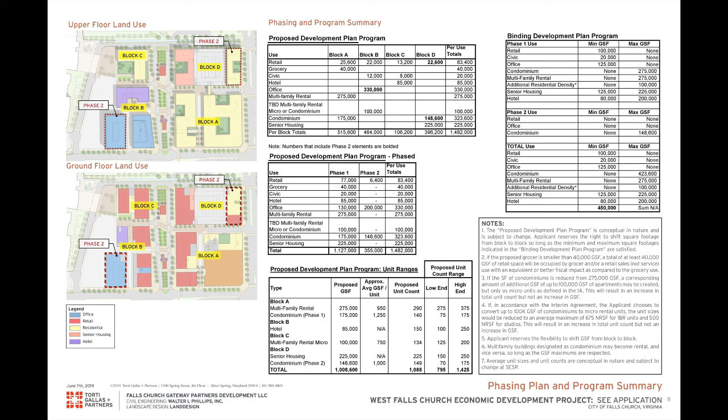And then similar here, we did reserve the right for the senior building to go back to this location, just in case. That's only if we aren't able to get—we don't think this is an issue anymore—but just in case the property shrinks to 9 acres, smaller.

This line would essentially come straight down. We couldn't fit the office building here anymore. So the office would go up here, Phase 2 res would be here, and then the senior housing would be able to fit here. So that's a kind of backup alternate plan just in case.

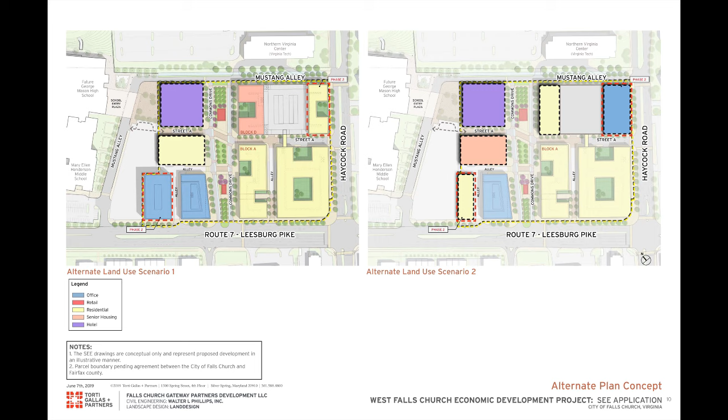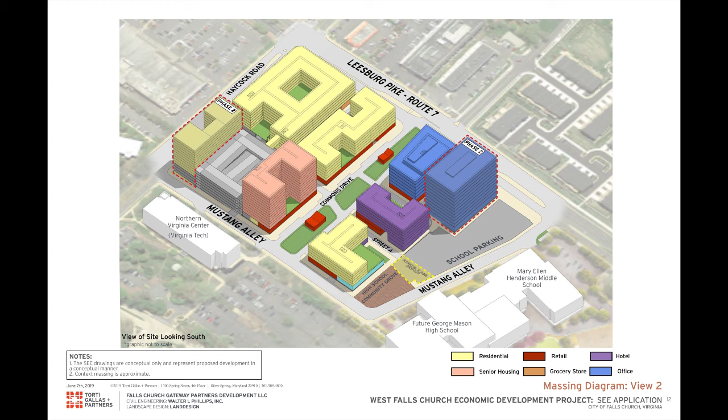And so the school is trying to figure out how to fit their parking count.

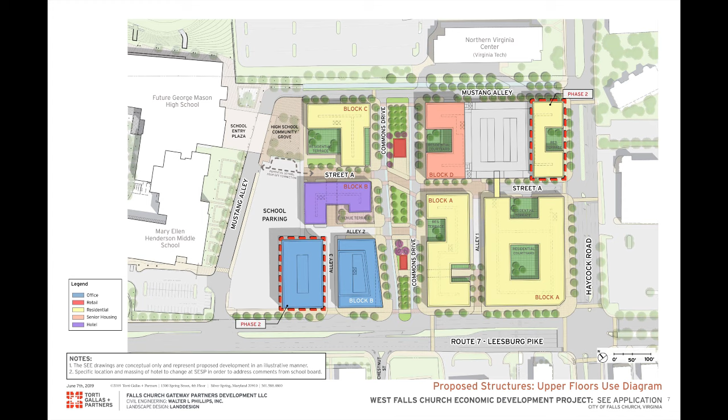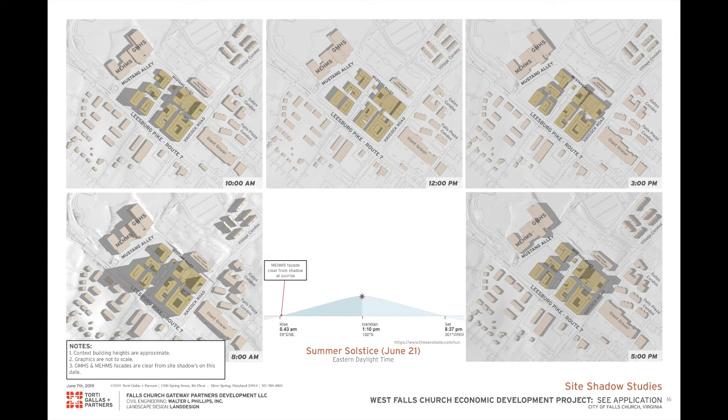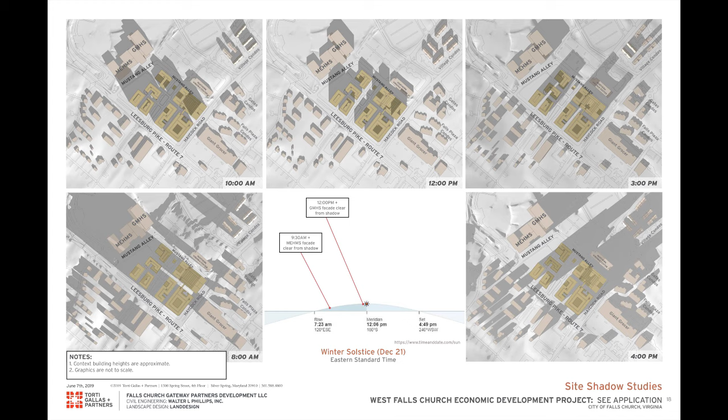Just to show you the few other changes—these are all in your packages. These are the new shadow studies, but as always, our site, because of the way we're looking at short days, is shaded as a buffer from the rest of the school. Other than December, in the winter morning at 8 a.m., everything is in shadow—the sun has just come up.

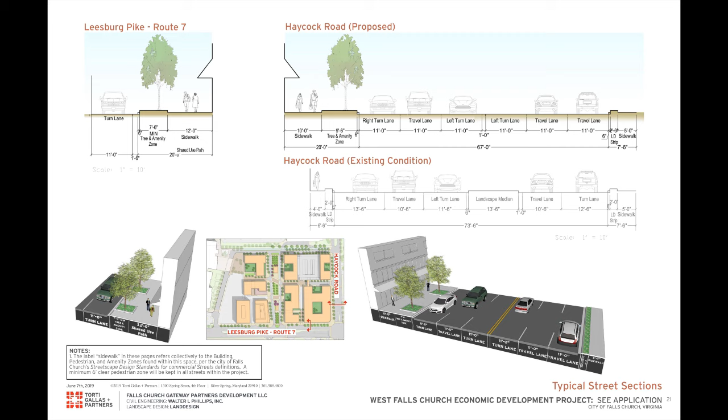We're also going to take advantage of the city standard, which allows for 3 trees in a continuous pit versus individual pits. Now it will give us almost a 90-foot long tree pit.

The other change is we're now showing 2 different bike solutions: the original bike solution, which is the cycle track on the road, and the solution with the bikes up on the other side of the curb. This is something we're going to study over the next 2 months, and when we come into SESP, we'll have to work with staff.

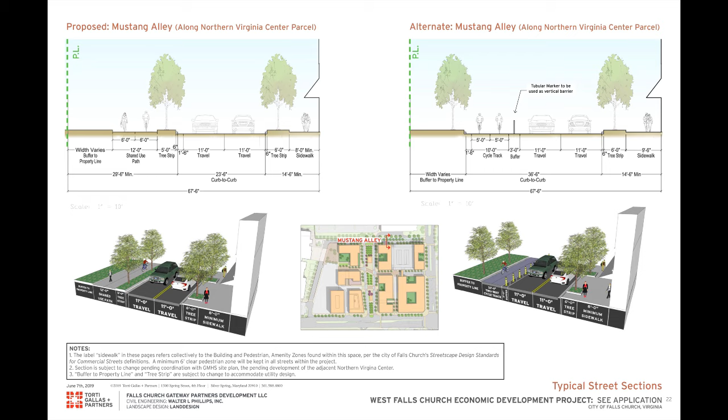Our latest thought is, depending on where the traffic study goes, that this actually might be the better solution. The reason is, in the future, if we need a left turn lane out of this road, especially now that we don't have one, Mustang Alley might need to be a right 2-lane plus a turn lane. So if we need that extra width, we can come out of the bike lane and the bike lanes can go up.

And still have a... that might be a couple of months before we show that interim condition.

Where would there be a left turn that we might need? So is it a left? Show it in the plan, put you in the plan.

So we've shown this as a 1-lane in, 1-lane out road. If this becomes a real traffic light, which is something a number of our boards and commissions meetings have asked of us, it would be logical that cars would want to make that left turn. So then, in order to have traffic flow, we would have a typical right lane and a left lane out.

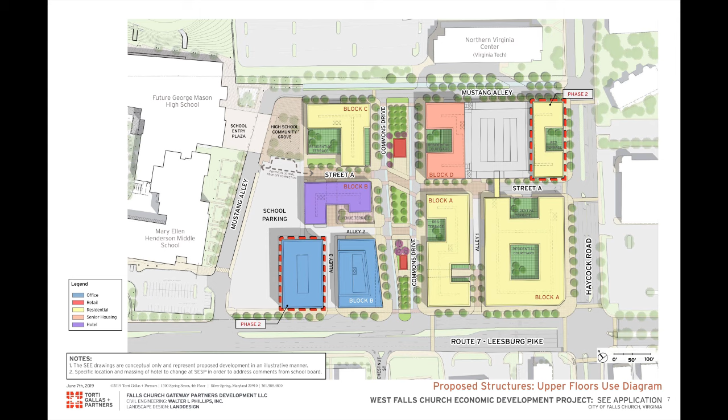One way to achieve that: in the interim condition you have 2 lanes, just 1 lane in, 1 lane out. Virginia Tech develops, the city and the schools own 20 feet of land on the north side of that street, and Virginia Tech will be set back from that 20 feet, so you'll have this 30-foot area. One option is we turn the bike lane into a turn lane and stripe it, with the bikes up on the new curb and sidewalk, so there's plenty of space for it.

There's not enough width, so the street's just not wide enough. You could do it by reducing the sidewalk on the south side, but it's already a small sidewalk.

So right now, the city and the schools own that 20-foot space between our side. It's something that can't be built necessarily right now, but we know it's likely to develop in the future after us. We just think about what the plan is originally about.

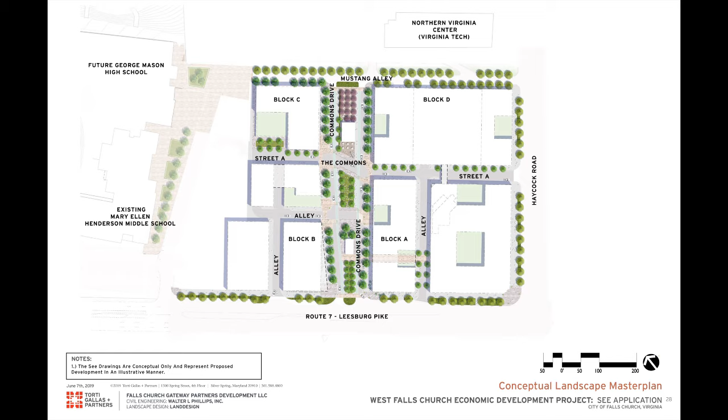So there's a green space up on the north side, an outdoor fun active space outside the kiosk, a nice big green space in the center, and similar spaces on the south side. We like the idea of the music venue here and the outside music space here, with the ability to close down this middle of the project. People would be able to sit out here and listen to music - really special. So that's not a change as much as just a shift.

And that is the last one. Those are the changes to the original plan. And then obviously we have the whole SEE.

All right, thank you very much. Are there any questions or comments? Ms. Hardy?

Will have to be good enough. So I'm going to start with questions for staff.

So I noticed that the net fiscals on this turn, submission 3, is 5.1 million in phase 1 and 1.8 million in phase 2. I recall that the fiscals last time around were 4.7. So what's changed? Have the unit counts changed, or is it just updated numbers?

That's good, we always like better fiscals. Did the commercial mix change at all, like more retail commitment? There was slightly more retail. I think the unit mixes, the ratios, were the same, but there was the additional 100,000 micro or additional residential.

Oh, I thought the 4.7 included the micro units, because that came with the IA changes, right? Yeah, that's true. I think it was mainly the retail and the office. Going in the right direction, so that's always a good thing.

So you have an entrance to the grocery up here, as well as an entrance down the corner. You can come in at this entrance and go up escalators and stairs to get to the main grocery, which is up here on this whole block. So we will have to think about how that facade is treated since we're exactly on the slope.

The reason I ask is I think about the targeted tenant. It just sunk down a little bit and it's just not a very prominent entrance. You've seen some grocery stores, like a Whole Foods or a nicer grocery store, that have a much more prominent entrance.

This will be prominent, a lot of light, a big huge open entrance right there at the corner. This will be prominent because it's basically 2 levels — your entrance is at the bottom and then you go up to the main grocery. So it'll be this huge 35-foot entrance.

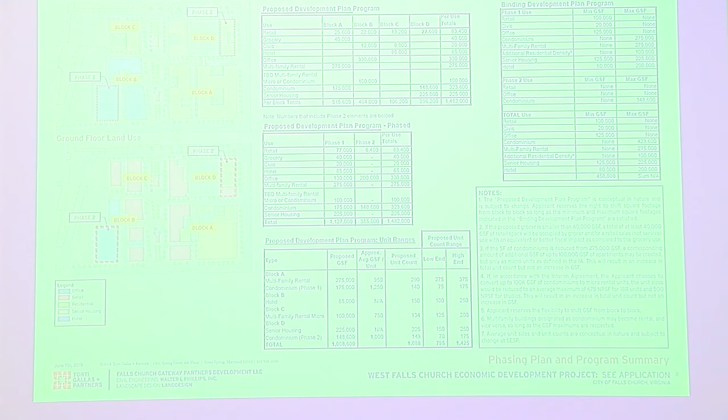Similar to, maybe, the Safeway in Georgetown on Wisconsin Avenue — that could be a good reference point to come into the store. At SESP we can give other examples, and we'll have renderings at that point for the submission.

Okay, last question for now. I want to talk about Alley 2 for a second, where that turnaround is. I think somebody had asked a question about turning into the garage. So you don't have the ability, but if folks do happen to turn onto Alley 2 because they've come in off of Leesburg Pike trying to drop off...

...and let's say they get stuck, their only outlet is to either turn through underneath what could potentially be the hotel, or turn back down Alley 3. Do you foresee any problem of people getting jammed up at the garage if they're looking to drop off because they made a wrong turn? How are you going to address wayfinding so they don't end up there?

Do you mean parents dropping off? Yeah, so if a parent does do that, they would have to go this way, but it'll be prominent enough. Yeah, but I can't tell architecturally what's right there to let you know that it doesn't continue through to school parking.

No, that'll be clear — there'll be a defined wall or something like that. This starts to ramp down to the garage, so that will literally be your entrance to the parking. In fact, it's probably got gate arms to take a ticket, so there's plenty of stacking.

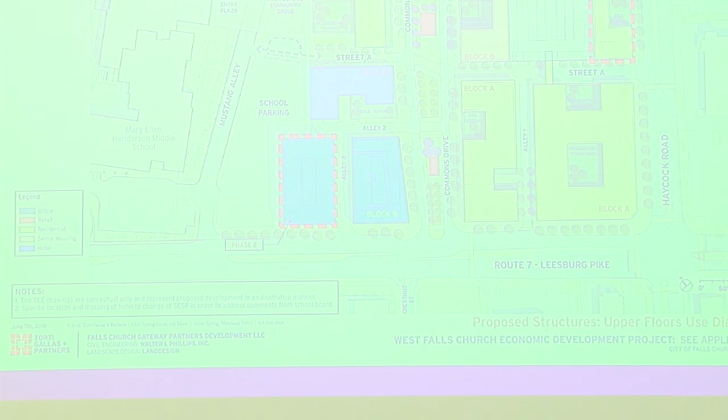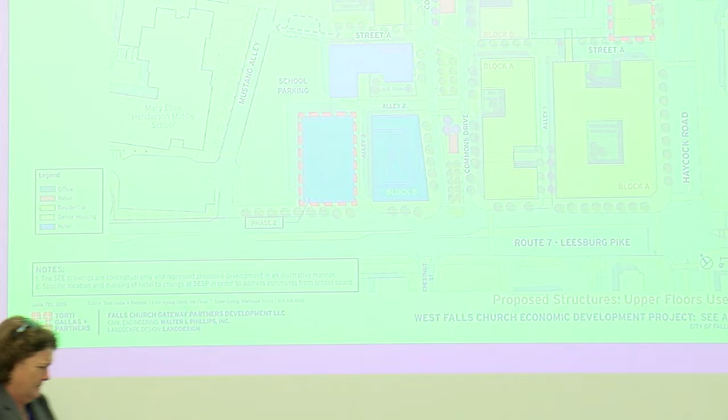It's more about getting to the point of no return when you've passed Alley 3 — people trying to figure out how they get out of there without having to go into the garage. I think we've handled it similar to how we did at Brooklyn Bridge, at the main intersection on the main street: you make a left into the parking and there's a yellow bar that says you are entering the garage.

But we'll have a pretty robust signage package that will come as part of our comprehensive sign plan. That will address stuff like that.

Why no canopy coverage on Alley 2? You've got it everywhere else — I mean you've got no trees there. Oh, so the difference is these are real traditional alleys, true alleys, meant for cars, not pedestrians.

This other area is meant as a shared space for cars and pedestrians, so we've softened some of the edges and kept the cars more focused in the center. We've added trees to those spaces and increased canopy coverage — those are more like shared streets or woonerfs. These are just true alleys going to parking and buildings, so it's not a place we want to encourage pedestrians, and the width is smaller so you wouldn't really have the ability.

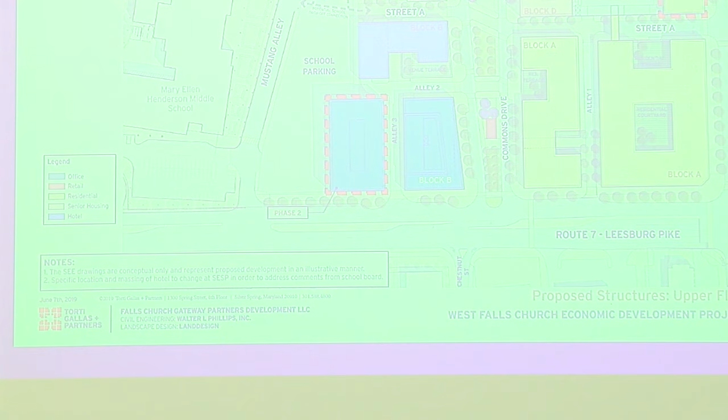Can I have any landscaping there? Those would not be landscaped — those would be traditional alleys, right?

And then crossing school parking—I know this is a question—but I think about after school, the direction kids would go if they were walking. You've got some kids coming out of high school who want to get a little quicker to Leesburg Pike. Other than going through the school entry plaza, you've got that little pathway going to school parking, but does it make sense to have some type of defined area to walk through to end up further down in the development?

I mean, it was almost like, if it's a traditional alley, it doesn't allow for pedestrians, but I'm talking about further down. We would want kids—we'd want to encourage this. They may walk through the parking lot, quite frankly. Is there a way to get from that parking lot into the development other than here, north and south, at some points? So you have to walk all the way through the parking to get into the development.

If you're coming out of the high school here, likely you would do that connection, is what we're assuming. And if you're coming out of the middle school here, you would take that connection or go this way. But there's a grade change here as you're going down towards the parking. We may be able to get a sidewalk along that edge—I don't know yet, we haven't designed it. But the idea is not to encourage kids to walk into the alley; I think there are safer ways to get them into the project.

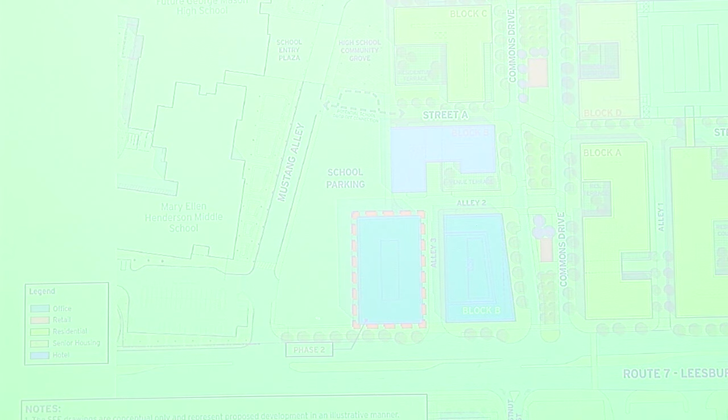I don't have an idea of how big that parking is, but I'm thinking more if somebody comes out and drops their stuff in their car, then they're going over without having to traverse the entire length of the parking. So if you think about our old plan where we have the structured garage here—pretty big, obviously—in this case, if you were coming out of here, you were still going either around here or around here. It's kind of a similar diagram either way, so I don't think it's very different, and I think it's common. It's not a huge building—this is only 300 feet. Okay, so it's a football field.

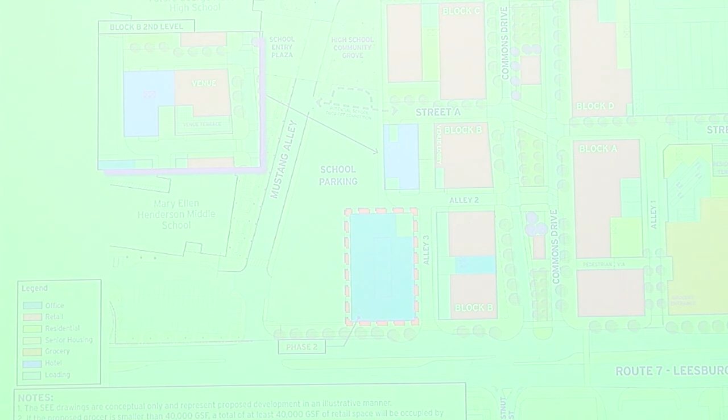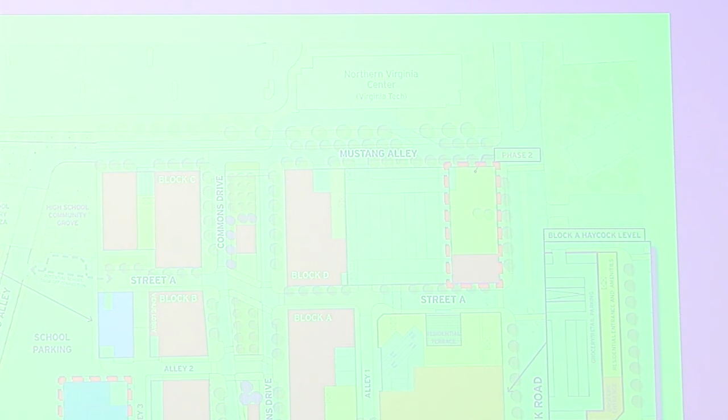Good, and then final question. So that hawk signal you have up there, we were talking about that traffic light—coming up on Haycock, you come up a little bit of the hill before you go over Northern Virginia. Is there going to be anything, other than that hawk signal, that would warn people they need to slow down before they actually see it? Because I've seen some people careening over that hill coming down towards Haycock.

So we've done new traffic counts, number one, and then at SESP we'll come in with a more detailed traffic plan once we have a better understanding of it. We've heard that comment as well, so whether it's signboards that show what speed you're going or something, we'll figure out the right solution once we design that pedestrian crossing intersection.

Just a little bit more on the housing matter. It's obvious you've spent a lot of time thinking about this and talking with the Housing Commission and others. I just wonder if in the materials we could devote a little more concentrated attention—doesn't have to be extensive—but the only bullet point I see that really speaks to housing affordability is pretty far down, at line 832, and it's a bullet point shared with bike share and public art, which are both fine things too.

As far as I can tell, if you're going to have 900 plus some dwelling units in the project when it's fully built out, then at 6%, this is going to end up being the largest commitment to affordable housing in the city's history since maybe when Tyler Gardens was built right after the war. The original City Center South proposal had a big play for affordable housing too, but of course that never got out of the ground. So I just think that—it's a question.

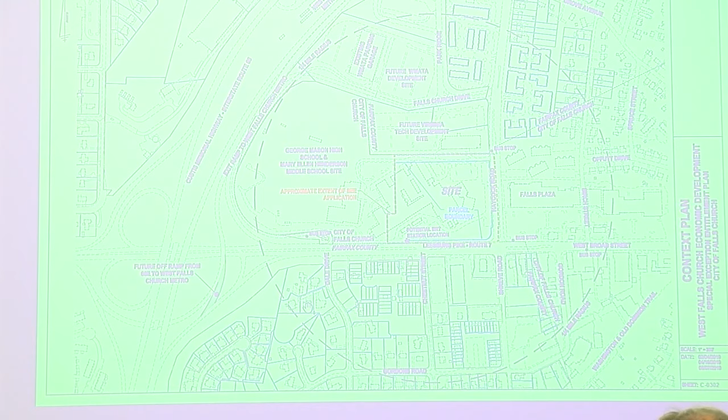Also, the other elements of transportation infrastructure, vehicle-to-vehicle infrastructure. As was mentioned, autonomous vehicles gives us an opportunity that will actually help sell the project. So hopefully we can set up some sort of an ongoing forum particularly for the transportation elements.

With regard to the environment, Councilmember Z mentioned a couple things. In DC, all the new office buildings have green roofs. Is that going to be true in this?

That's great. In fact, in my office, they're actually selling the herbs every Monday that are grown on the roof over your head. We were just talking about that earlier. I should have bought them and brought it tonight. I forgot. Depends on the kind of herbs. Sorry, no, I'm literally not just- In Virginia, we were just talking about that on your back porch, that it would be nice if there was some like rosemary or thyme. Yep. Not yet, that could be only a DC thing, not in Virginia.

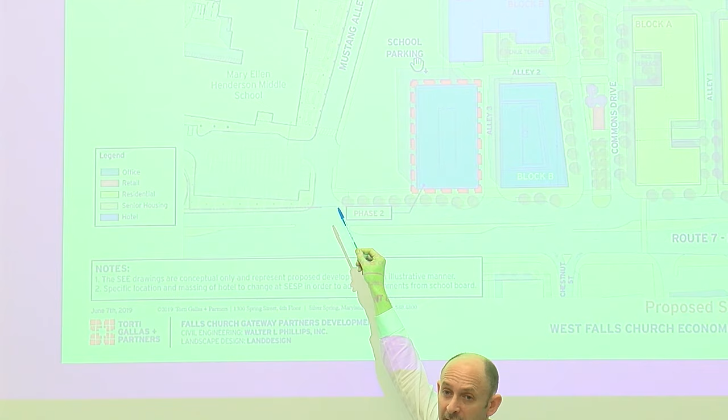So essentially, if we draw that line straight through the middle of this Phase 2 building, the schools would essentially get that original surface parking lot that was in the plan, and then this portion of that office construction staging. So that's to try to maximize the amount of surface spaces the schools can get until the office building gets built. And so how many years is that? When do we think Phase 2 is going to start? Probably Phase 2 office if we stabilize the first office building in 2026, so the Phase 2 office building is probably starting construction in '26, '27 right now.

There's another voluntary concession about the parking garage cladding surrounding, and I know there are a lot of pictures in here. We had originally talked about, when the parking garage was on Leesburg Pike, having something different involving the schools. I'm assuming you still intend to do that when it fronts on Mustang Alley. We still intend to do something more attractive than a typical garage, and we'll come in at SESP with elevations on the sides of the garage. We haven't designed that yet. It probably won't be as extensive as we were originally intending, because that doesn't front on Route 7, but we'll do something attractive.

And the bollards, the traffic pattern — when we had talked about this a few other times, there were bollards that were going to go up during certain times, and they're still in the plan? Yeah, so if this goes through and the drop-off goes through, those bollards will be right there when it's working. And then when it's not school pickup and drop-off, you could actually cut through that parking lot, Street A to Mustang Alley? Exactly, yeah.

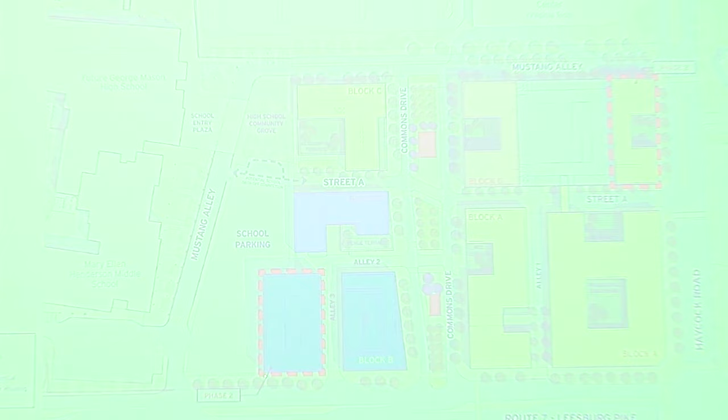Is that accurate? Yeah, so this building has a 9-foot setback, and these are the 0 lot line, essentially 18 inches. We do have an exhibit we're negotiating as part of the comprehensive agreement that would show, running along that edge, where the schools wouldn't be able to build a building within that space. They could have green space, they could access the buildings, but the building line would have to be 20 feet off of the building face in order to have windows.

That's the main setback. Normally you'd do like a 10 and 10, each side would do a 10-foot setback. So I just want to make sure the school board understands that.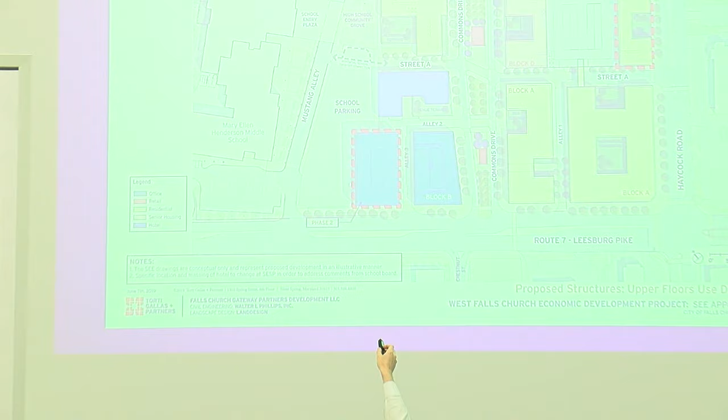You're welcome to come up and speak into a mic, but essentially what's proposed is that some of the buildings along the lot line with the school are proposed to be right on the lot line. As you heard, because of building code, you don't want fire going from one side to the other. You need to be able to get out of buildings, so them not having a setback makes us have a bigger setback to make up for their setback. So along the red line where the school parking is, and the building above that, the school board wouldn't be able to build a school facility that had windows.

And I'm not sure even if it doesn't have windows, I think you still have a setback requirement if it's not right on the lot line. So even if they had to be 20 feet if they want windows, but if they don't have any, the only way for us to have windows on the lot line is for the schools to allow an easement that says they won't build in that zone. So the 20 feet, just to give you a sense of scale...

We have an exhibit we're working on with the city, but that's 9 feet right there, so you can see how this building is set back 9 feet from the property line. The schools would typically have 11 feet on the side that you wouldn't build on anyway - that's a very typical condition. And then here would be the full 20 feet.

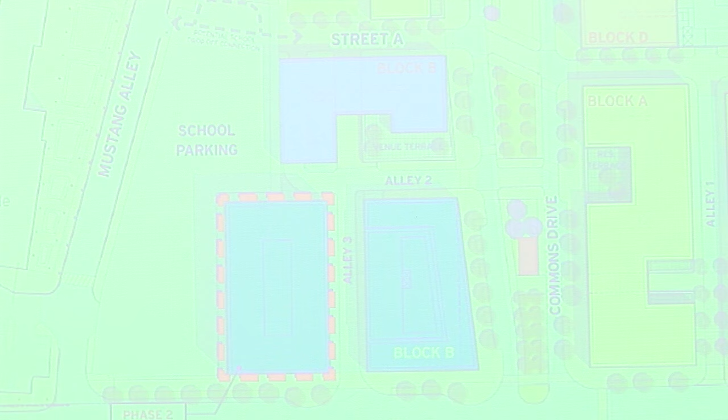So it does have some restriction as to what happens in the future on the school property, but it's one of the things we need for square footage to fit. I understand it, I just want to make sure they understand it. Does the school board understand that? You're welcome to come speak on this.

Thanks, Mr. Mayor. I'm not in a position to comment right now on whether the school board understands. Of course, we will be having a discussion of this at our meeting this Tuesday night. But certainly we have access to all the material and everything so we can make sure we understand the recommendations. I'm just not in a position to speak on whether the board members themselves are satisfied.

I guess what I'm trying to make sure is that we discussed it at the last school board presentation a week or two ago. We made everyone aware, we've had that conversation in our regular coordinating meeting with Dr. Noonan. So it's definitely been something people are aware of, and we've created an exhibit for it.

But that's going to affect you for the next 100 years. Basically, if you want to put a building 80-some years from now, 10 foot back or whatever, you can't do it. And I guess there'll be an easement you'll want to put on land records that restricts what you can do in that zone. So anyway, all I'm saying is before we agree to it, I just want to make sure you guys understand it and it's agreeable to you.

If you have an objection to it, now would be the time - maybe not tonight, but in the next week, because we're going to approve this next week, right? Potentially a week from tonight. So anyway, I just want to make sure that's out there for you all to consider. Okay.

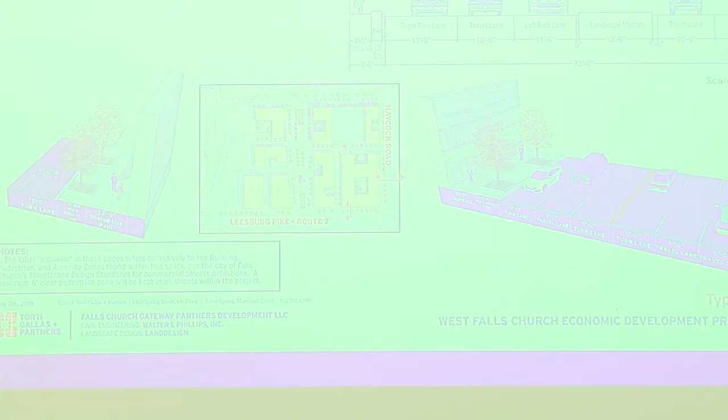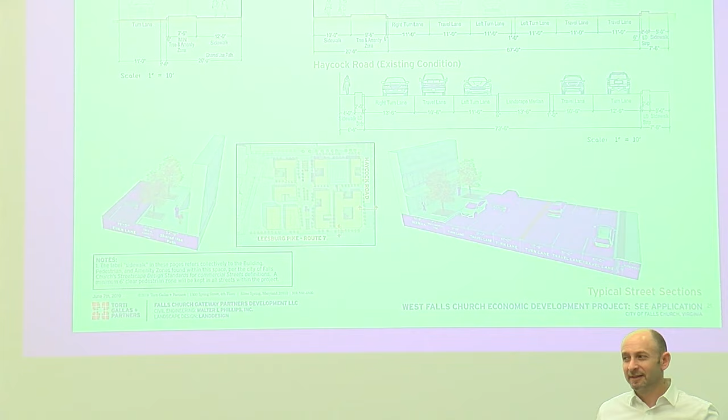This section is taken right here, where we would have a left turn lane project. So we are essentially getting rid of the median to incorporate the left turn lanes into the site. We are narrowing the road, but also minimizing it in order to add the left turn. Right now there's a pretty good sized median - I can't remember how much, but I'm thinking maybe 8 or 10 feet.

13.6, so that's going away in its entirety. I have to say I do have some concern about that. My kids walked across that street a million times going to middle school and high school, and it's nice to have some refuge crossing, at least where the HAWK signal is, because the traffic can be kind of weird there.

One side could be great, the other side's not great. There's a crossing guard in the morning, but I don't think there's a crossing guard throughout the day. I guess all I would say is I'd ask you to give some consideration of a small refuge someplace, maybe particularly where the HAWK signal is, for kids getting across the street.

So we'll incorporate - the left turn lanes, you're going to have a median before you enter into each turn lane. And so in the areas where the crossings are, we will incorporate refuge.

Anyway, just give some thought to an adequate size, because you've got school kids, right? You've got a ton of kids walking across, and we want to encourage, to a greater extent than is current, kids to walk to school.

So I guess I would just say I'd give some additional consideration to making sure that although you're narrowing up the lanes, which is helpful in a lot of ways, making sure we have safe refuge to cross the street is also, I think, pretty important.

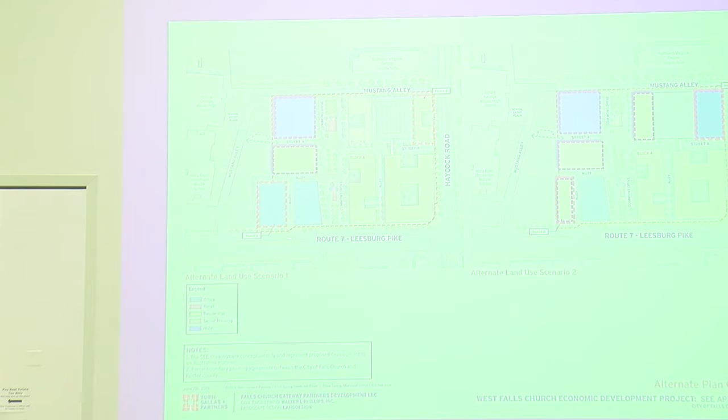So how would you get there, if you're in the second office building? You would come right out onto Leesburg Pike and walk. But how about at the interior? You wouldn't be able to - I mean, I suspect most people don't want to walk on Leesburg Pike, the top of the building.

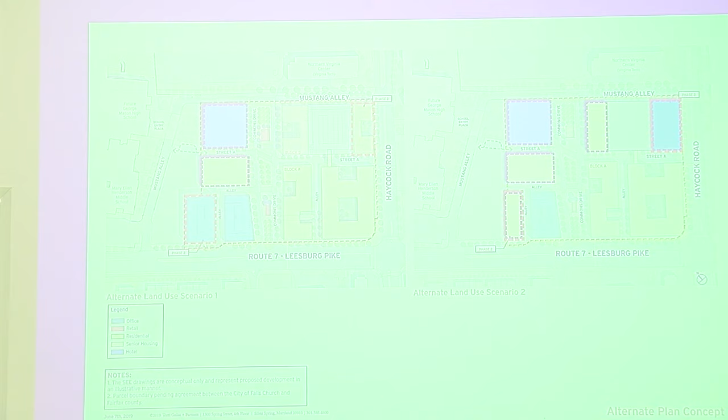There wouldn't be a pedestrian exit alley. So the lobby of the office building would be right here, and you would come out the lobby right onto the 7, which is a 20-foot wide sidewalk, and walk from the front if you want pedestrians out there. We're going to detail along this front end.

So we don't want people coming out in the alley - that's kind of the design of the building by intent. And if you think about the hierarchy of roads and projects, you have to have a back access. You've got to have a place for your loading.

Got it. But we wouldn't be able to make that alley work because it's a narrower alley with tree pits, because you won't be able to get the trucks through the loading. So we do have to have some streets in the project that act as loading areas for some of the buildings.

So, but the top of that building, the one that's not on 7, the other end - again, naturally people are not going to want to walk on a major road that has an ingress-egress point. As soon as you walk out the door, there's an ingress-egress point as well. Isn't there a break in 7 between the two office buildings? So it seems to me like people would probably naturally want to go up the other way.

Can you describe the sidewalk scenario on the top end of that? There's only one point of ingress-egress for the building - there's no second entrance to the building. We haven't gotten into that level of design yet at all.

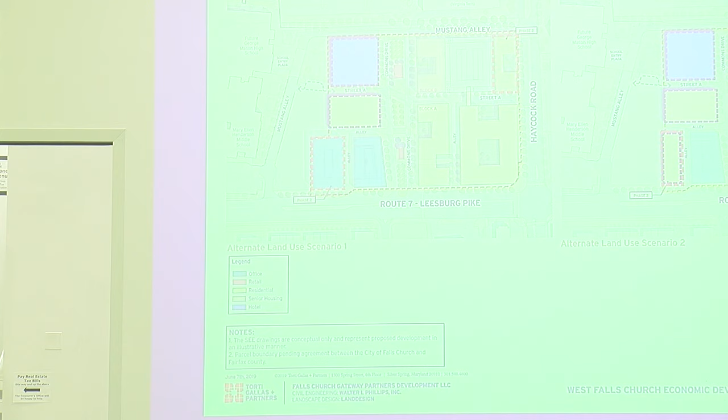This may end up being a pedestrian-oriented space to some extent because we have the hotel lobby back here. So to the extent that is, then we can figure out a way to get - maybe there's an exit out the back or something. That's what I would recommend, that you consider that as well.

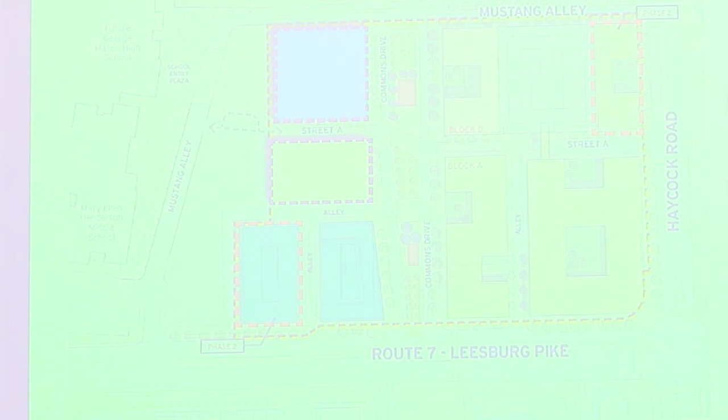Like not just a one-sided building on 7, but actually ideally 4-sided, but certainly 3 or 2. You've got the school on the other side as well that we care about. That's our view. So anyway, I guess I would suggest maybe considering trying to make the top side of those buildings pedestrian oriented, and some trees as well if you can.

My next comment relates to the ADUs. I think we ought to have some objective means for considering this. Looking at this, it talks about net neutral to the developer or the owner. To me, it really shouldn't be the owner's perspective, or the city's perspective, but more like a third-party perspective - net revenue neutral to a third party, an appraiser or someone like that, not to you with your own baggage, or necessarily the city. In other words, what's the objective cost to it from a third party's view, not necessarily your view of what's net neutral, or ours.

What I don't want to do is get into this - it's kind of like you go to a rug shop and say, I really like that rug, and they say, oh, that's the most expensive rug. We come in and say we need some money, and they say, oh, it's not that much. In other words, it's going to cost us X dollars to do it, and that's from your perspective. I think we should agree to a formula that's very specific. Yeah, I would agree with that.

My next comment relates to bike share. I know you haven't designed all this to the nth degree, but even just putting some placeholders down, like for a bike share station, would be nice, just showing it's an important consideration. We do have that on the plan. Oh, you do? Okay, good.

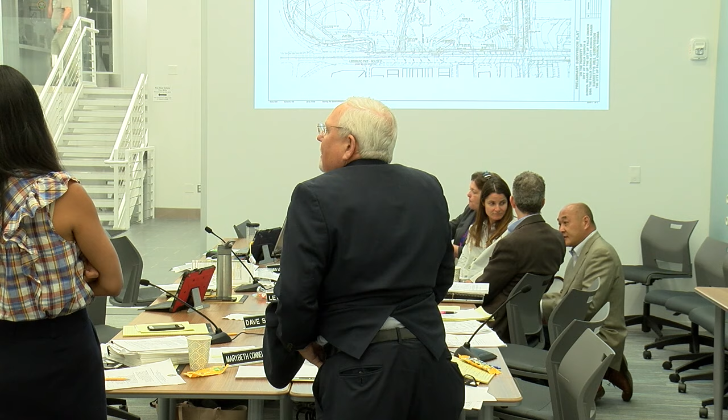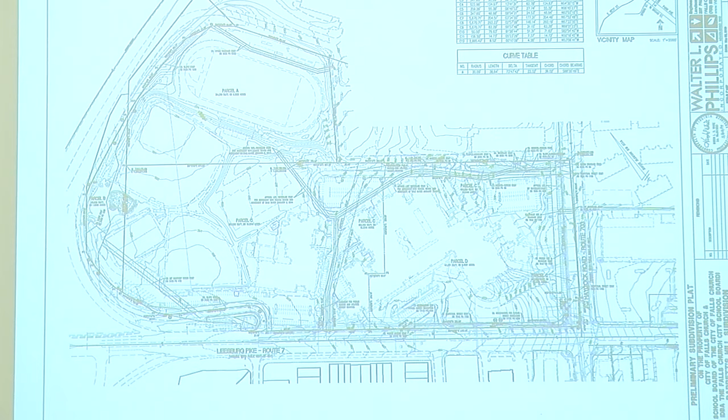The paper copy's a little bit easier because some of the lines are lighter, but it gives us essentially the parcels of land that exist now and that will be done as part of a subdivision. So parcel A, which is up here at the top, and parcel B on this back side, those two pieces will be sort of moving together.

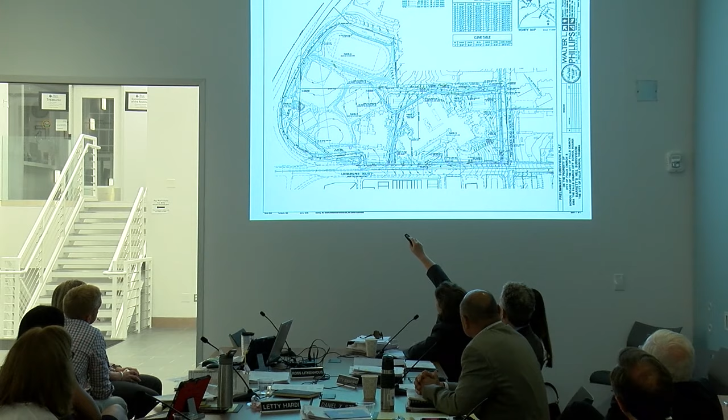They're currently owned by the city. They will be conveyed under this exchange to the school board as it's contemplated. And then the school board currently owns everything from the inside of B all the way to Haycock Road. And that parcel exists today.

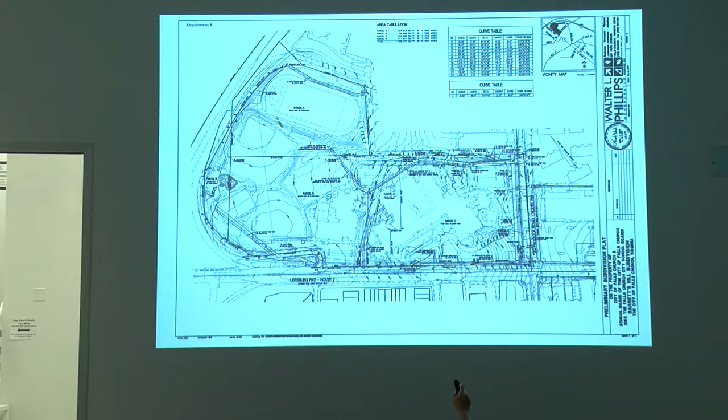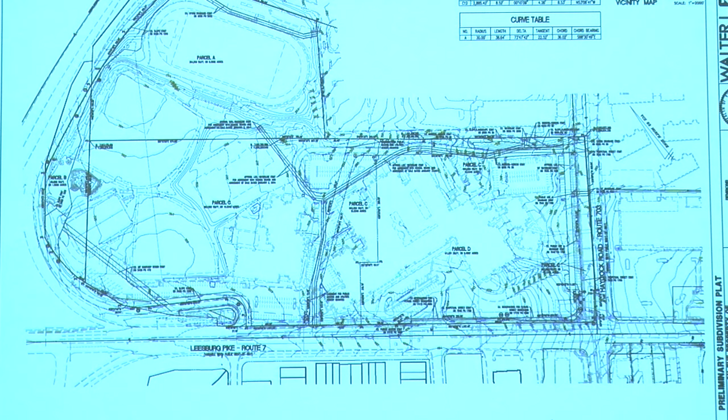Part of the subdivision that's being created that the Planning Commission had before it tonight will create a new parcel, which is this piece, parcel D, and that is going to be the relevant development portion to be used with a partner. You can see the little notch that allows for that phase 2 office building that was talked about earlier. But essentially what's before you tonight, or will be next week,

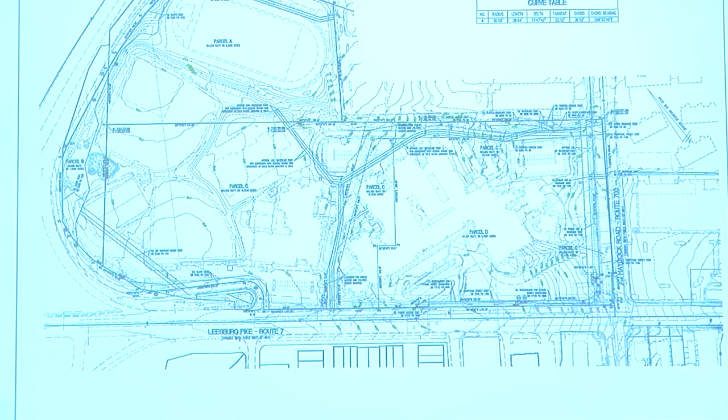are the exchange of parcels A and B to the school board, and parcel D will come from the school board. That'll be conveyed to the city so that ultimately it can be conveyed to the EDA, who will then enter into the ground lease with the developer.

You'll be asked to approve 3 documents. There's an exchange agreement, which is a basic agreement. The draft is attachment 8 to the report. It sets forth the plan to exchange the parcels and the terms under which we will do it. It's a pretty basic agreement being between the school board and the city, but it provides for when the closing will be and how that will be handled.

And then there is a deed of re-subdivision, vacation, rededication, dedications, and conveyances. This deed, it's one deed, does a lot of things. First of all, it'll be signed by both the school board and the city council. It creates this re-subdivision. As I said, the only new parcel really being created is parcel D, but everything's being renamed. And since the city and the school board are both owners of property within it, we would both sign it. So it'll re-subdivide that.

It will vacate certain property lines and rededicate them to create those new parcels. There will be the conveyances. There's brief paragraphs in there, one from the school board to the city, one from the city to the school board that does the exchange we just talked about. It will also contain a dedication of a right of public access over what will be Mustang Alley, as well as the right to put an easement for utilities purposes in that property. And that's really the deed.